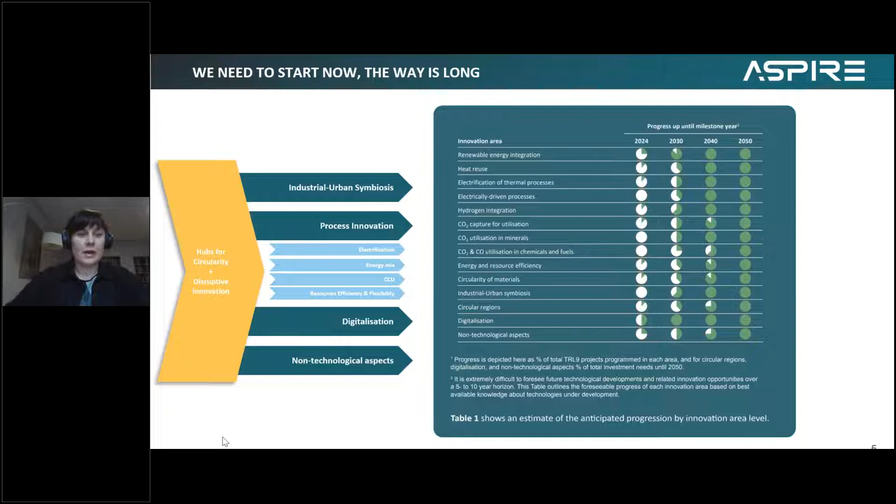As you can see, the most relevant in terms of scope are renewable energy integration, electrification, electrically driven processes, and so on. However, we know there is no silver bullet, so there will not be one innovation that gets us there. What we are looking at is actually a combination, a mix, or what we call a tapestry of different innovations to achieve climate neutrality.

On the energy side, innovation is needed to change the energy mix through new technologies for the integration of electricity and energy efficiency. Also, waste energy reuse will be playing a significant role. So we put all these areas that we identified as important contributors into the innovation areas and programs of Processes for Planet 3.

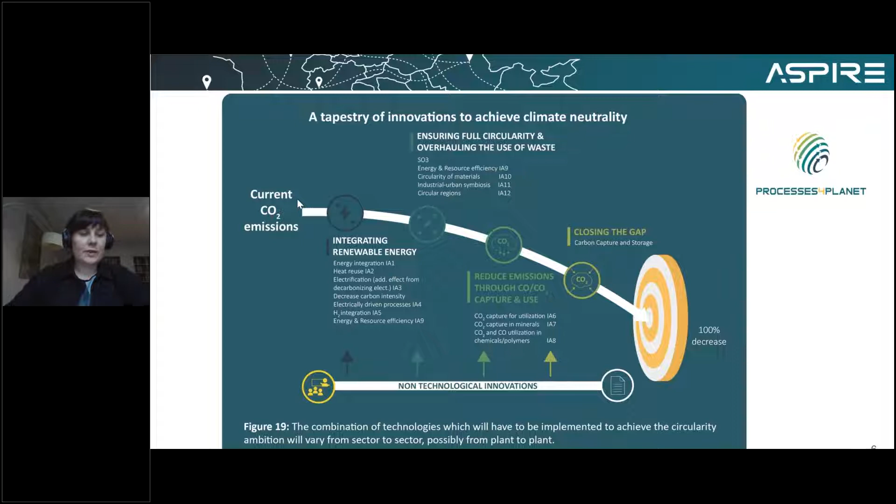If we put this all together, Aspire is a unique cross-sectorial community, and projects that have contributed to Aspire are of course part of it. Their innovations and advancements are very important there. Then we have Processes for Planet 3, which defines innovations that are needed to move forward. On top of that, we have defined 2 initiatives: the first is first-of-a-kind plants, and the second is hubs for circularity. I will not elaborate on them today.

With this, we are aiming at achieving impact and climate neutrality, near-zero landfilling, near-zero water discharge, and a competitive EU process industry. With this, I finish, and I want to thank you for giving me this opportunity to briefly introduce Aspire and Processes for Planet. I would like to hand over to the projects so they can speak about their innovations and achievements in more detail, because they are a very important part of bringing the process industry closer to its climate neutrality, circularity, and competitiveness goals. Thank you very much.

Thank you, Evelina, for giving this short insight into this research and innovation community of Aspire and showing us some really impressive numbers and insights on the impact. I would like to give over to one of the projects of today's meeting, which is Perform.

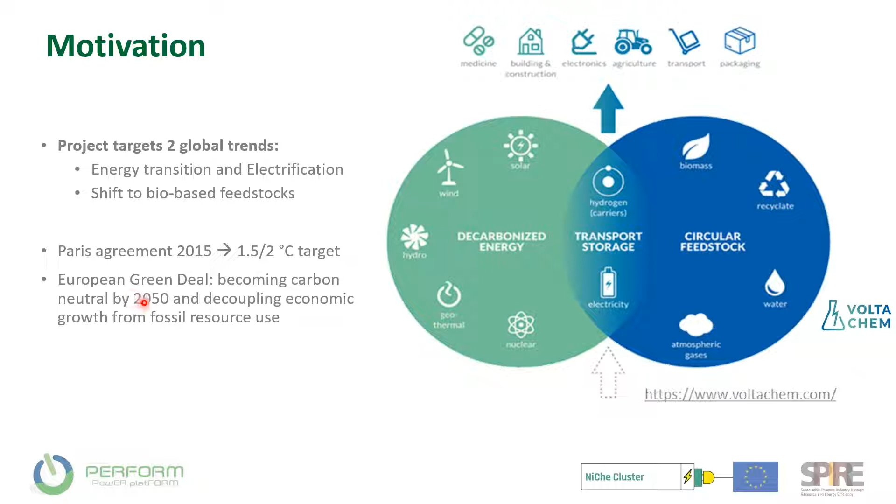The project concept is based around an electrolyzer, an electrolysis process where you use electricity to convert feedstocks. In this case, we're using renewable feedstocks from biomass, in particular second generation biomass that is not in competition with the food chain. We use renewable power, and we produce high value chemicals that could be new chemicals or plug-in chemicals for the processes.

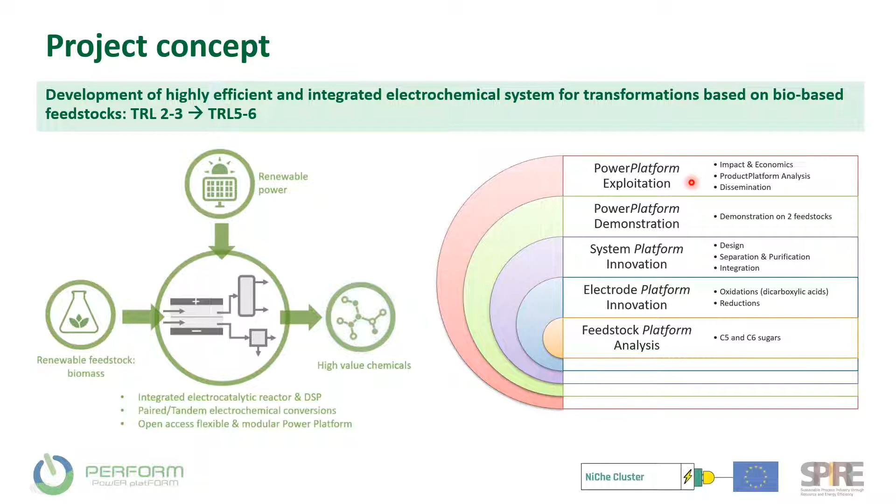The project is built upon different phases, based on the feedstock platform analysis, where we started with analyzing the sugars and the feedstocks that we can use for the electrochemical conversions. Platform innovations: we design on a smaller scale, then scale it up and integrate it and demonstrate it, and in the end it's about exploitation of the results. I'll come back to that later.

Key innovations in the project: we want to do paired electrosynthesis. In an electrolyzer you have an anode and a cathode side, and we want to utilize both sides, which is far more efficient than using only one side. The upscaling of novel electrodes, electrochemical process intensification, that's about integration, demonstrating the whole chain, and also the system design as a whole for scale up.

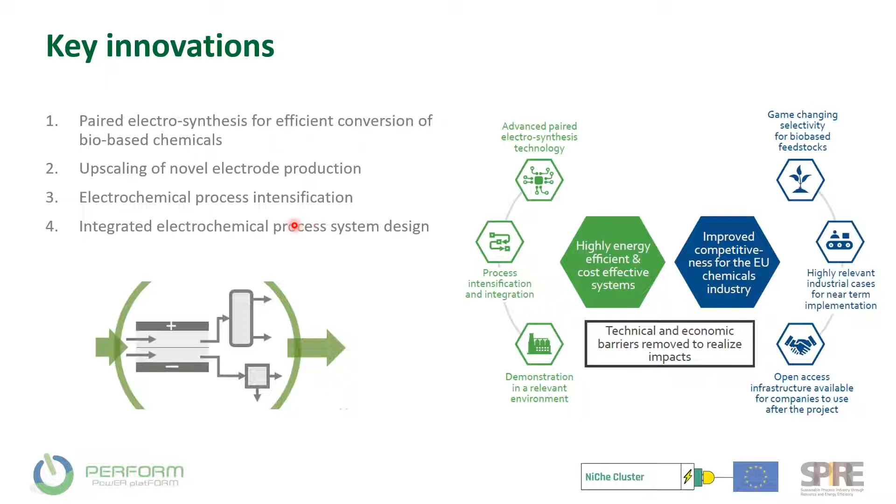We have two showcases. One is about paired electrosynthesis, where as input we use furfural and levulinic acid, and we will produce maleic acid and valeric acid. The other showcase is a tandem electrosynthesis, where we go from glucose via glucaric acid and oxidation, then hydrogenate to adipic acid. Applications of these products are polymers, plastics, lubricants, and also applications in perfumes and cosmetics.

This is backed up by our industrial partners, Novamont, Radici Group, and Perstorp, who will do the product assessment of what we get out of the demonstration, and test if the products are fit for their applications.

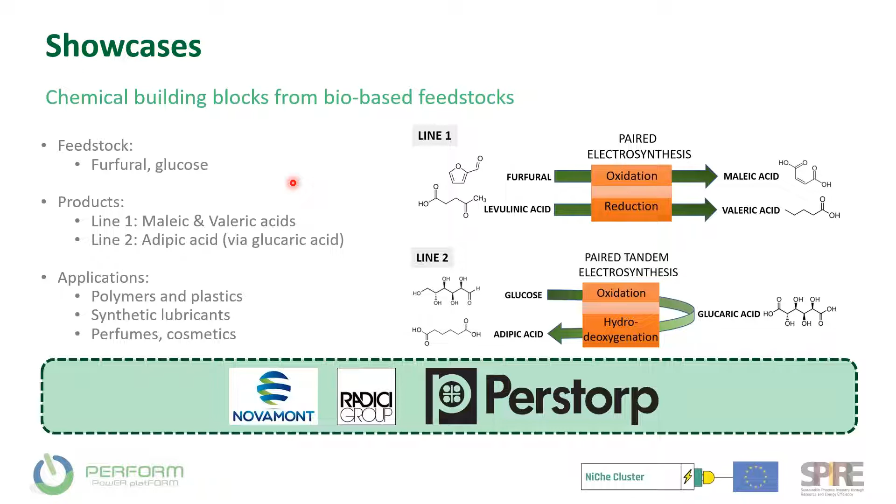We have a strong international consortium, 11 partners, 7 countries along the whole development chain, from electrochemical system and catalyst experts, research institutes, reactor development, system integration, until exploitation and commercialization, with companies and universities from throughout the whole of Europe.

Expected impact is described in the main KPIs that we defined, one of which is the electrochemical pilot. That is a big objective deliverable of the project, because it will remain and will be open access infrastructure.

We aim for increased energy efficiency compared to non-coupled electrochemical processes, because we're doing two things at the same time. We will develop electrocatalyst electrodes with high faradaic efficiency and low overpotential, which means less losses in your process for the selective oxidations. The aim is to demonstrate this performance at TRL 5 with selectivity of 80%.

An important part of these electrochemical conversion systems is the downstream processing. I'll come back to that later, because actually you need more units for processing than for the conversion itself. Techno-economics and benchmarking is always very important to show that you can scale it up in a commercially beneficial way, that you will have a business case, and also with respect to the decrease in CO2 emissions that you expect. Then dissemination, communication, and exploitation, already mentioned, very important.

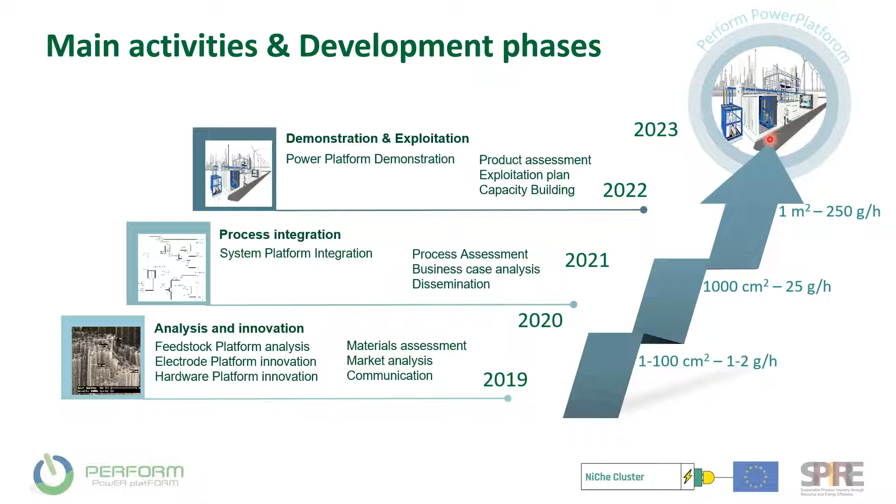That didn't work because there's a lot of problems in the logistic chain and materials and components that you just cannot order at the moment, with long delays again. The pilot will be ready now. All the equipment will be ready by the end of the year. So we will be testing in the first half of 2023, hopefully just before the end of the project, to get the great results that we aim for.

So some project highlights. Where are we? What have we done? Well, the feedstock has been analyzed, and we established a process.

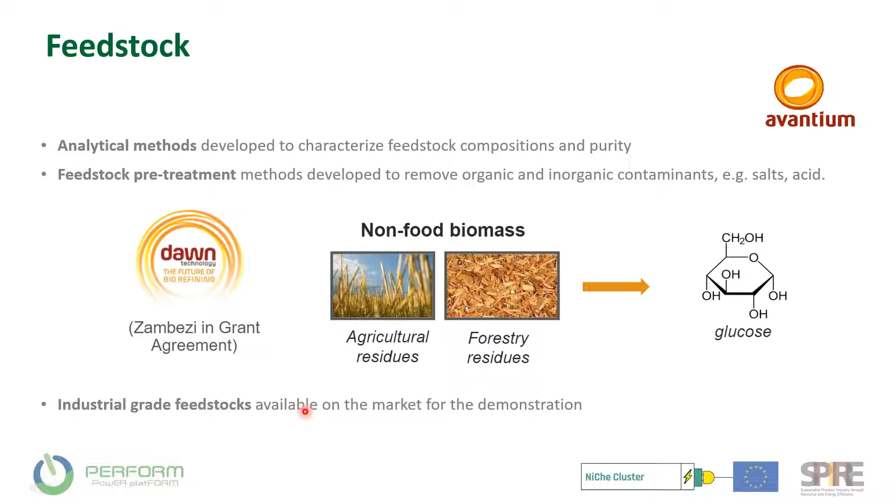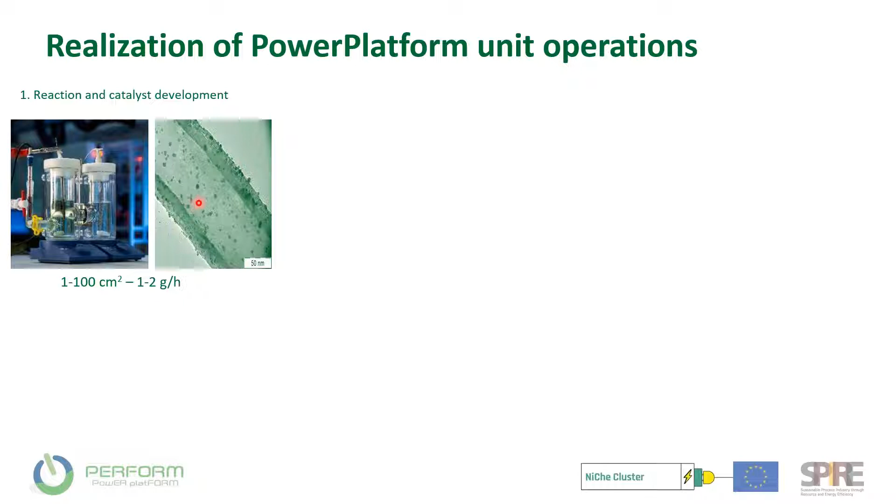In the Power Platform we started with reaction and catalyst development, so there will be new materials and new catalysts. Then we went to reactor and process development - this is the 1000 square centimeter reactor that we tested, developed by EasyTech and tested by TNO. From all this data, we could go to a process design for the full-scale stack plant that's currently being built.

It's similar to this one, and it's about container size, and it will go to 1 square meter of reactor stack, at 250 grams per hour.

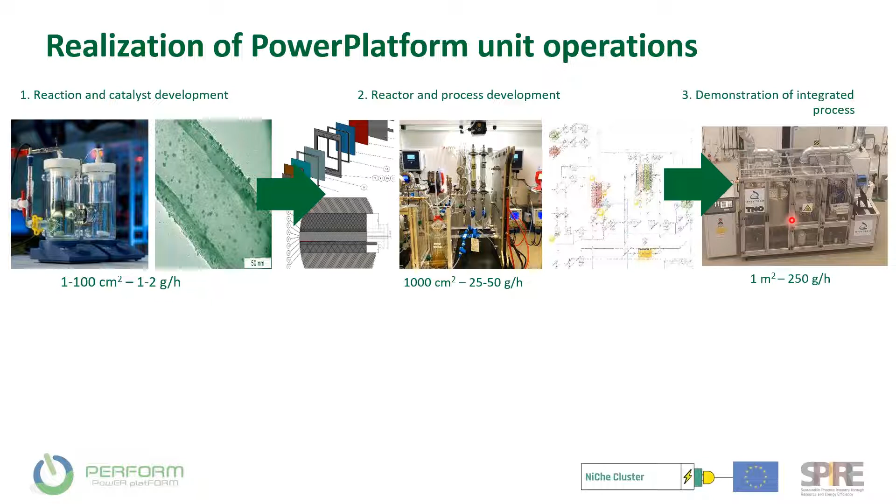Well, this is not it, because you need a lot of steps beside the electrochemical conversion plant, and that's called the downstream processing. So what do you need? You need to recycle your electrolytes, you need to purify your streams, you need to extract your products.

So we need a rather large electrodialysis setup to get the salts out again and for the recycle of your electrolytes. Then we have different units like concentration, crystallization, filtration, liquid extraction, and distillation. We don't use everything for all the routes, but these are the setups that are now available in a modular way, and we connect them together in one system.

And in the end, you arrive at your target product. In this case, what I show you here is maleic acid.

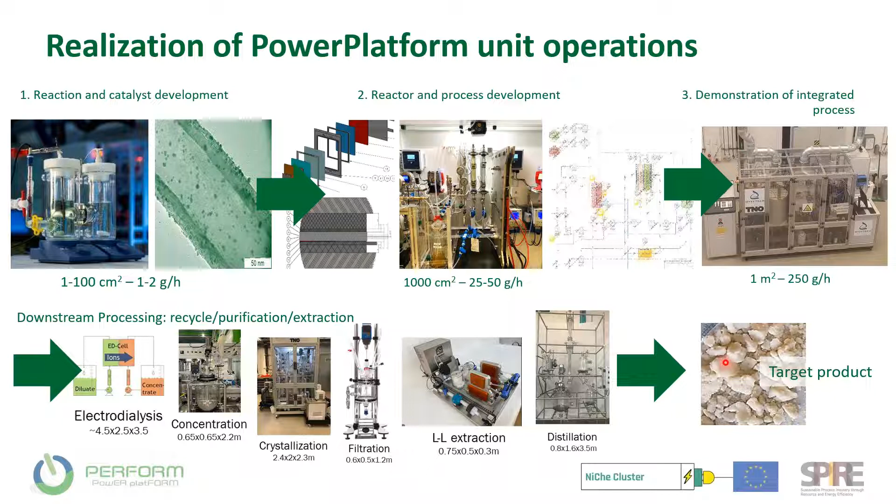To be a bit more specific, what we've been doing in the lab, we already showed this at 1000 centimeters square. Here is the reactor again. So the showcase here, we go from furfural to maleic acid. It's an oxidation in a 1000 centimeter square reactor, and we use a 5-liter crystallizer.

So we synthesize with a yield of 80% of 5-HFO, which is an intermediate to maleic acid, a conversion rate of 99%, and a faradaic efficiency total of 70%.

Then we did a separation process from the reaction mixture, using pre-concentration followed by cooling crystallization, filtration, washing, and drying. So that is the chain depicted here.

And we reached a separation yield of 85%, purity larger than 95%, already very close to the targets and the KPIs that we set ourselves.

We saw some coloration, so there is still some degradation products in there. And also there is some sulfuric acid still in there, which is the salt that we use for conductivity in the electrolyte, and it should be taken out, of course, in the product.

And there's also 1% of 5-HFO present still in the end product, and that can still be optimized in the final setup. So here you see how the product looks like in small scale. We can already do tens to hundreds of grams of product with this setup.

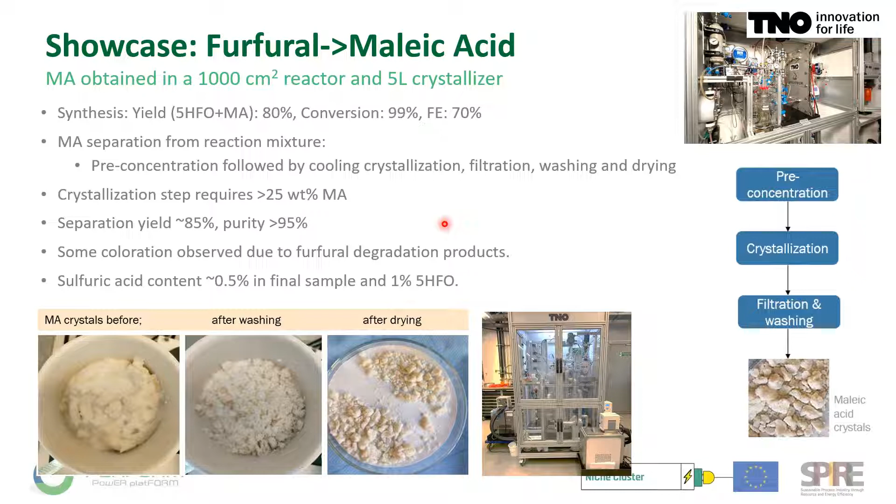And then, of course, we have to go to the full scale demonstration next year, and after that, we will have a lot of data gathered, and we can go to the process assessment and life cycle assessment, which is an important part of the project.

And we also can do optimization and scale up of the technology to have a development plan beyond the Perform project. What can we do with the platform? What can we do with the demonstration cases? And also, how can we maybe have different demonstration cases on the platform?

And the process assessment also comprises application testing that we're doing by the industrial partners. So this is a task in the project, and then another task is the business case analysis, where of course we have to show, or hopefully can show, that we already have attractive business cases.

And the preliminary TEA based on the laboratory data that I just showed you indeed shows potential positive business cases if we reach indeed the target performances. And for some of these products, we're already really close to that.

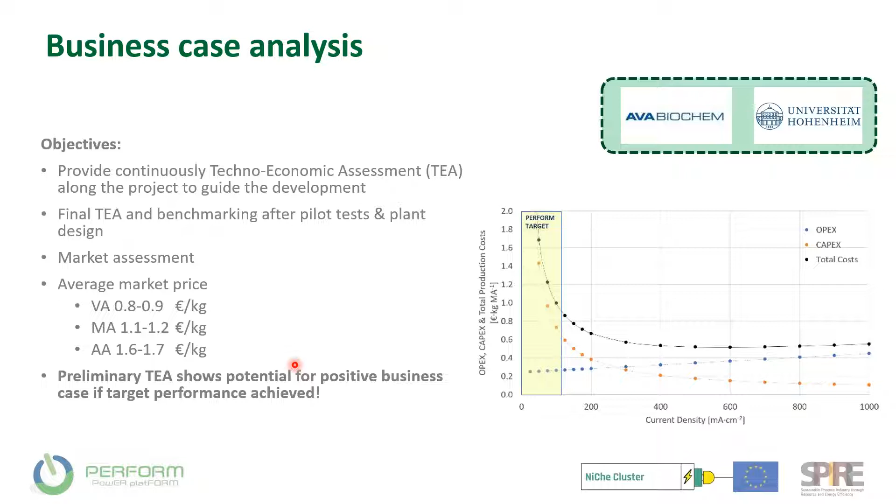And finally, dissemination, communication, exploitation, capacity building is very important. With this respect, I'm very happy to be able to present that in this workshop.

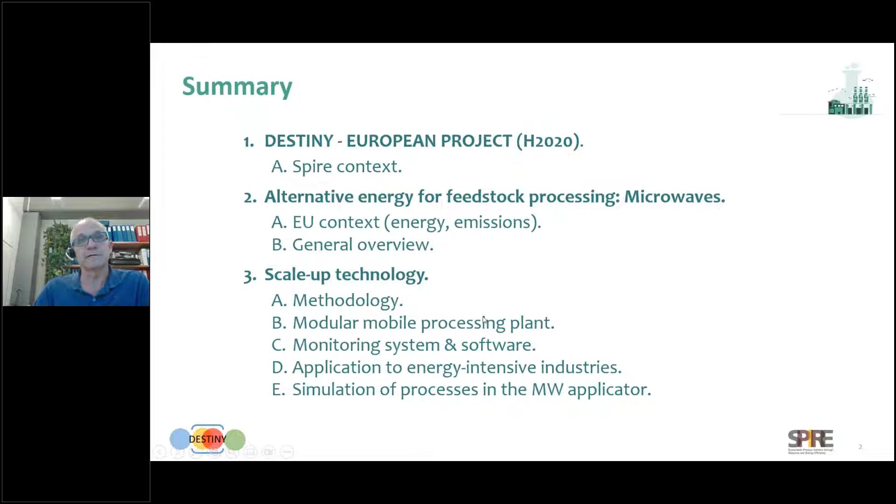This is the summary that we will speak about. Destiny is a European project inside the SPIRE context. We are using microwave as an energy alternative to the gas or fossil fuels we are using now, and later we will see the scale-up technology we are doing, or how it's developing at the moment.

Inside the context of SPIRE, we try to cover three main things: electrification of industrial processes using microwave technology. No other kind of energy source is involved in this, so only microwave technology for all the process.

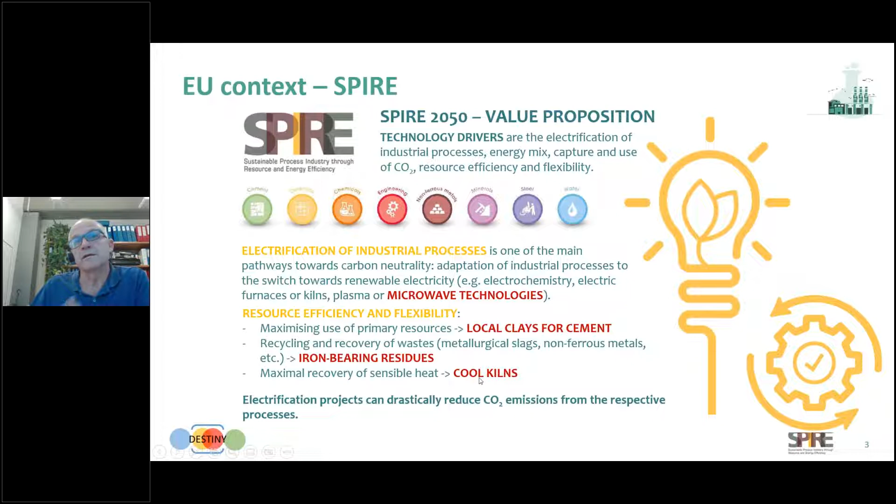And efficiency and flexibility: we are maximizing the use of primary resources, for example using local clays for cement instead of having long transport. Also recycling, using for example iron bearing residues from the steel industry, and maximizing the recovery of sensible heat using cool kilns. So this is the thing we are doing now.

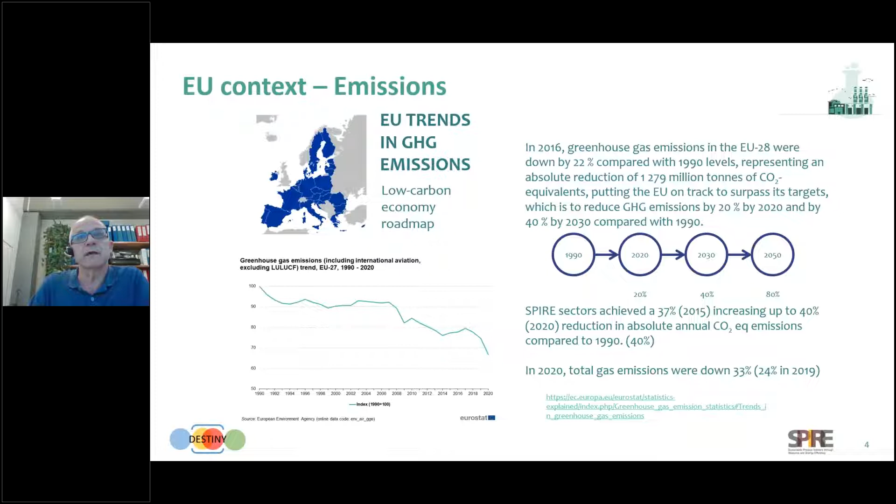In the context, unfortunately you know too well, the key issue in Europe is to reduce CO2 emissions, and electrification is one of the solutions. Microwave is the technology we use for many reasons, mainly because it's probably the most efficient at the moment to do that.

Unfortunately the price of electricity is now growing up too fast, and the geopolitical situation is of course pushing too much, and this also makes the opportunity to encourage and try to change the industry in Europe.

The general overview of Destiny is to try to do high temperature microwave processing using a first of a kind system for 3 materials in 3 sectors: cement, ceramic, and steel.

In the cement industry, using calcined clays as pozzolan to substitute 30% of the material, the clinker, with this material. In ceramics, it's used to produce pigments.

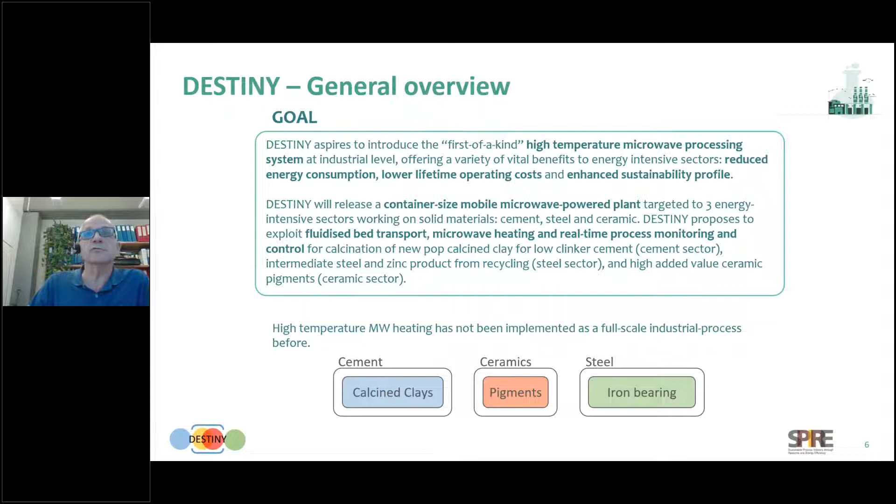The conventional colors are also new, so it's new technology - you can use new formulations, new colors, new pigments. And in the steel sector, for iron bearing materials, that is quite relevant to save these byproducts, converting the residues into byproducts.

The concept and challenge is to make a microwave system, knowing better the interaction between microwave and material, even creating new science and technology involved in the system - for example, determining the dielectric properties in continuous operation, and implementing this in the system.

The microwave applicator design is able to process high volume and high temperature for this kind of product.

The third point is the monitoring and control strategies, because it's a new system you need to monitor in different ways. You have different problems that appear, and you need to consider the system differently than conventional, longer existing systems. So there are many implementations we need to solve, also for microwave.

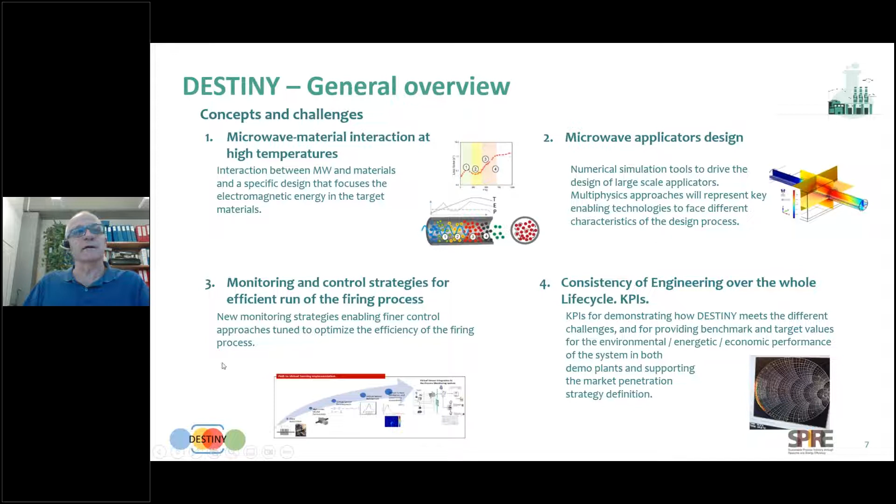The fourth point is the consistent engineering over the whole life cycle, and implementing the KPIs - determining the KPIs to demonstrate how Destiny covers the targets that should be covered.

The consortium is made up of 15 partners: large enterprises, SMEs, consultancy companies, research, technology providers, industrials - more or less covering Europe. Some countries are not directly involved, but indirectly they are also involved.

The concept and challenge is to make a first of a kind system, starting from raw materials, from feedstock. Some partners are quite expert in that - they have the industrial teams that can handle the microwave kiln system and cover all the other systems to have the final product. In this case it will be pigment, calcined clays, and pig iron and zinc, as you can see here.

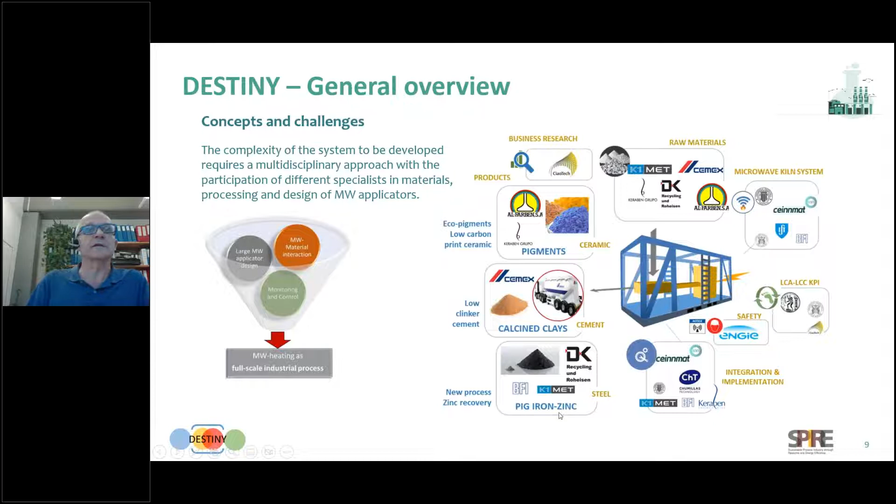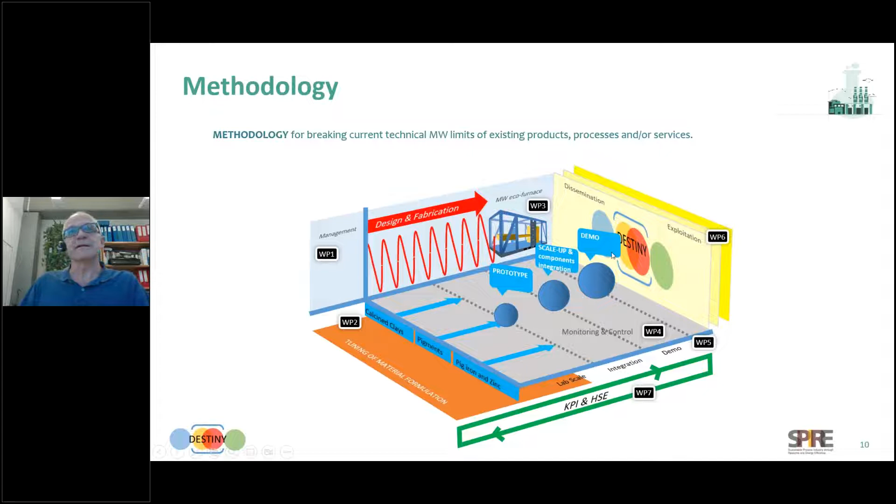The methodology for implementation goes from lab scale to integration and demo. Now we are at the last stage, and the other work packages are all running to cover the whole system. Now we are in the last step of demonstration.

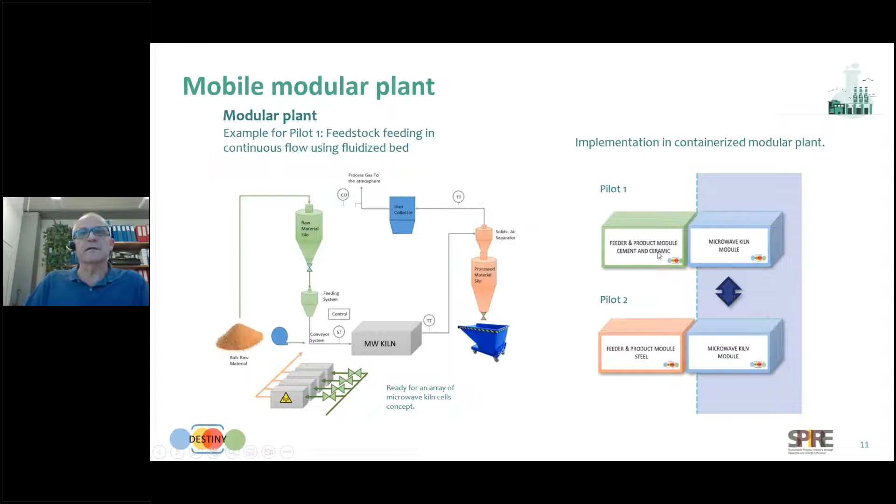So the idea was to develop a modular system, modular plant, based on the microwave kiln, that later you can replicate to have an array of kiln cells that we call a module to cover the production. So you can just add elements to create a huge plant. In the pilot, it's based on the microwave kiln module and the feeder module, and the feedstock. In this case, we decided to do different plants, one specifically for steel because it's more different, and the other with cement and ceramic, which have more similarities in the system.

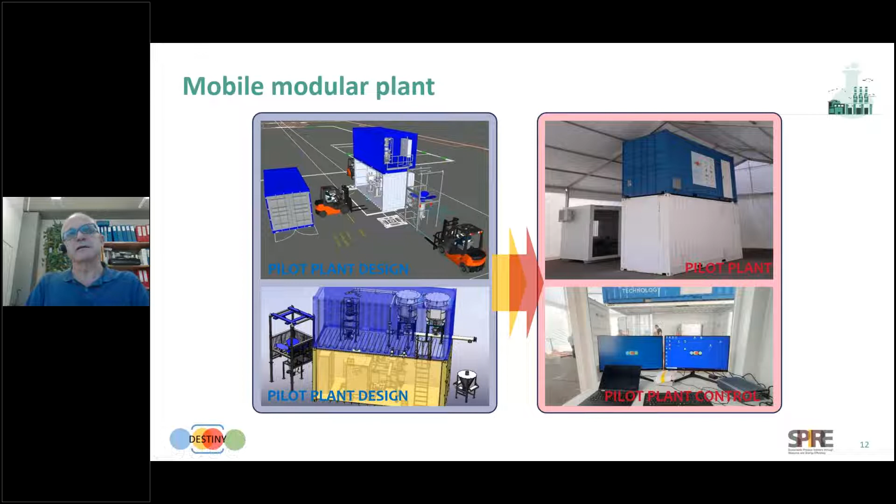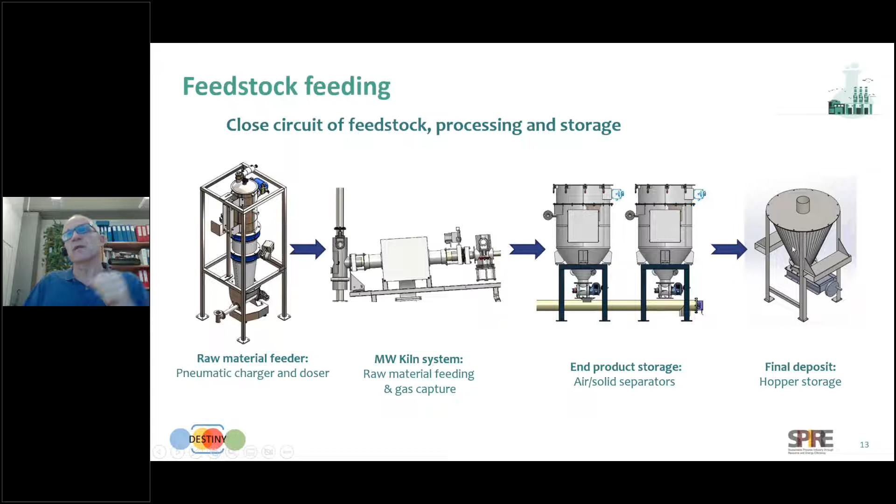So this is the feeding system, from the raw material feeder, all pneumatic, so it's quite fast. We are using the fast system, to final deposit storage.

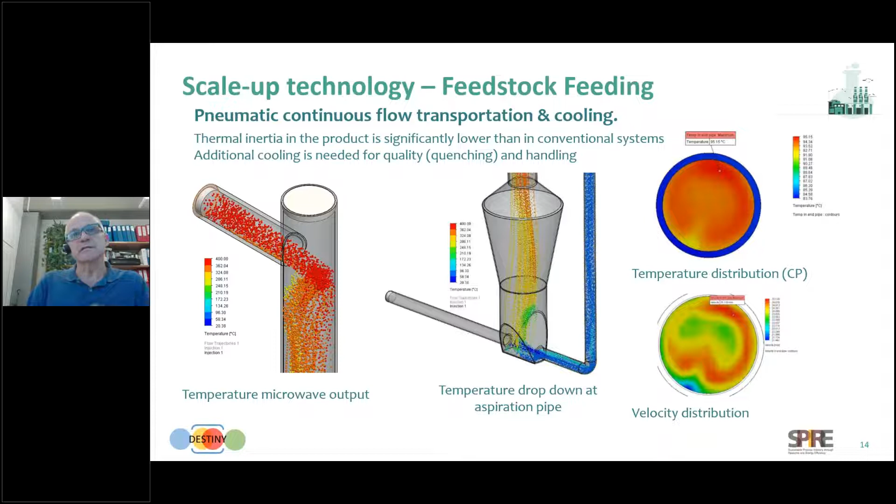Considering also the cooling system, because it's pneumatic it's easier and has some advantages, faster for the system. For the microwave, fortunately we have a very fast residence time, so it's very short, so the material can go faster than in the conventional system.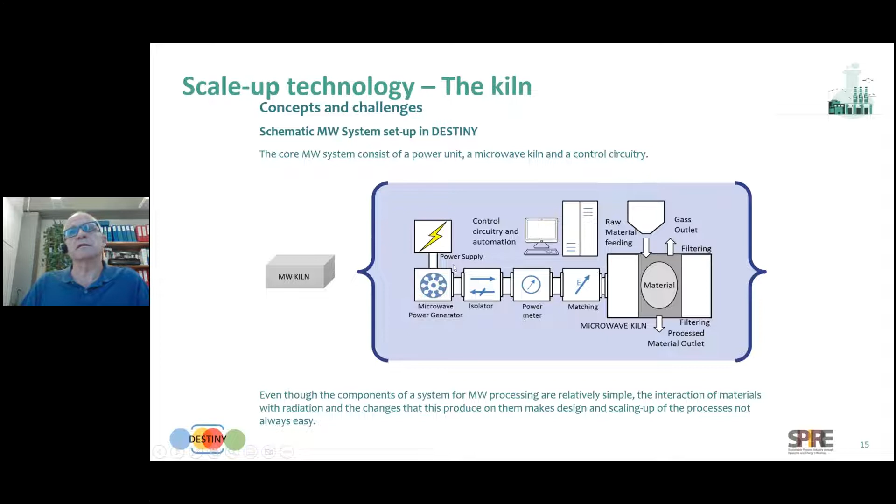So the system, yes, there are some technical things. Yes, how is the kiln? I will pass through soon.

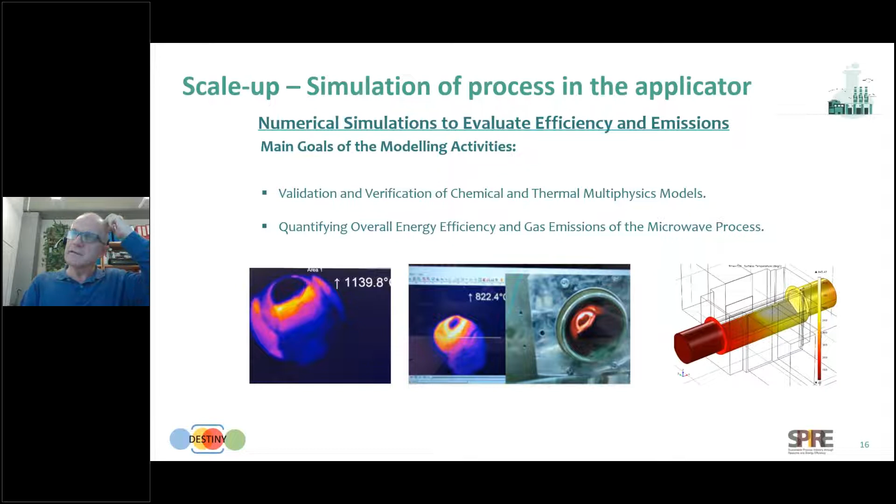So this is the modeling, just some screenshots just to see the aspect of the material going through the reactor, we can say, and of course everything is modeled before, and later just to correct things, the change.

And this is the comparison between the conventional and Destiny, the microwave kiln, just to see the difference and the main differences from each other. I can say just a few words: the conventional kiln is for large production, thousands of tons per hour, and this is not suitable for downscale. With microwave it's suitable for downscale, so for flexibility of production it's much better, and it has other advantages.

Other relevant things: the long start period that you need for the conventional system, and the microwave is switch and go. So it's quite fast to put into operation, and you don't need preheating or changing things. So it's quite simple from this point of view. It's difficult to create initially, but later it's quite robust.

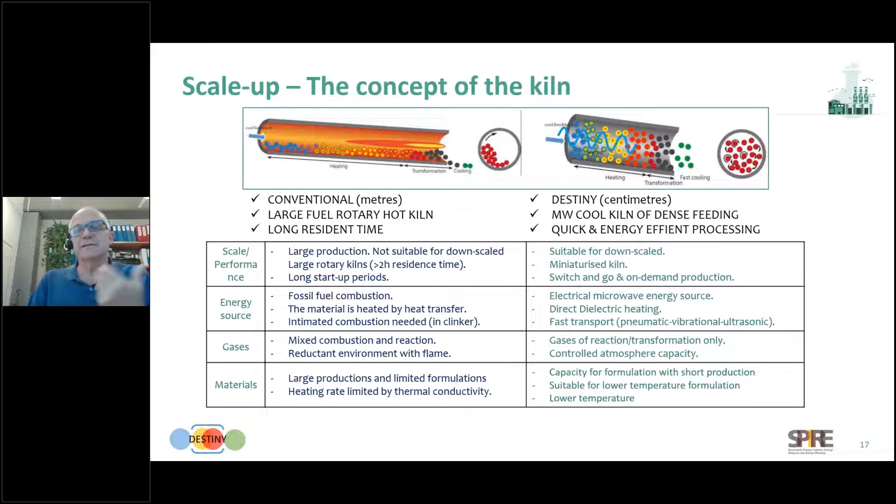Other relevant things are the gases. In the microwave you can recover the gases because they're only gases of reaction. So there's no CO2 contribution, no combustion gases, just the gases of the reaction that you can then use for other things.

Okay, this is the design, just to see from the design of the simulation to the performance. You can see here some points, how it is - it's marked red because we are working at more than 1000 degrees, so we are above this temperature. But the system casing is always metal, and it's quite cool, so they are not overheated outside.

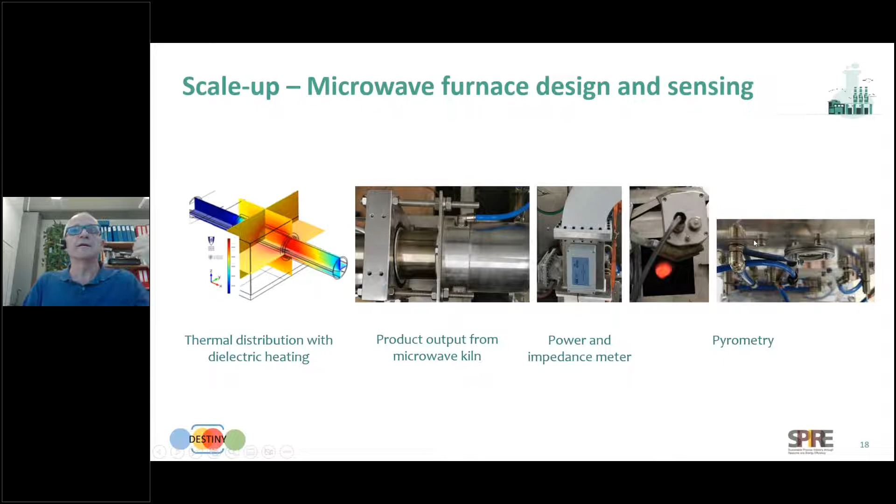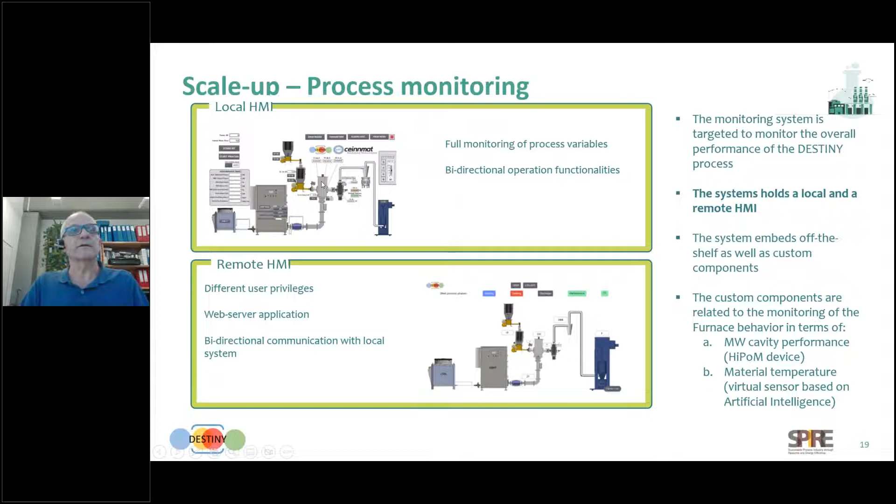A monitoring system, of course, is quite okay. You can control it by local screen, and also, from the beginning, because of COVID, we put in a remote interface just for the colleagues. They can take some samples, some inputs, some results from the beginning, and now it's very useful to work remotely. So you can operate locally and analyze the results remotely.

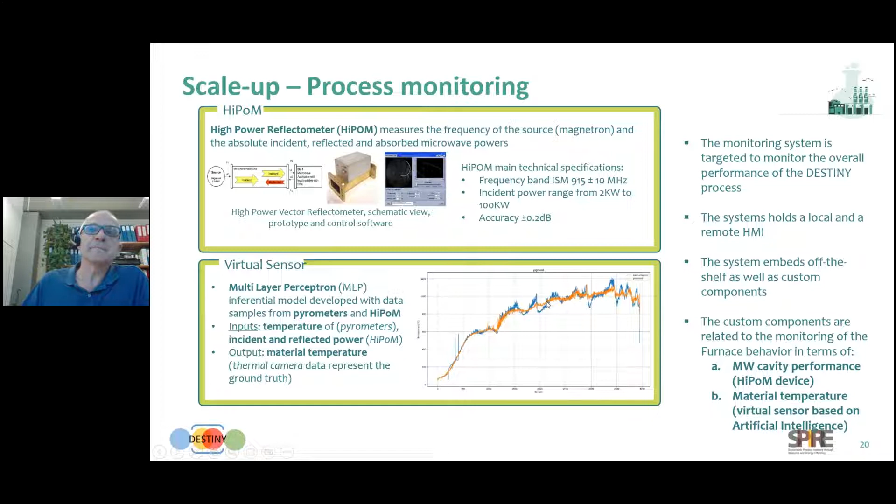So some detail of the data we collect. This is the system, how is the temperature - the real temperature is the blue one, for example, and this in brown/orange is the simulation you can obtain with the soft sensor that the team is developing.

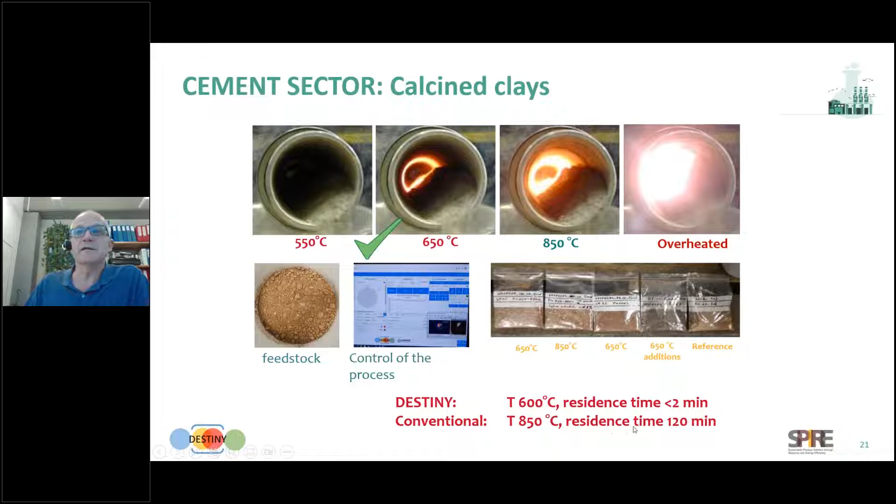So some example: in the cement sector, for calcined clays, we obtained around 600 degrees, a perfect target for perfect results. More than that was useless, was not needed. So the conclusion is that the advantage with Destiny is that 600 degrees is good enough, and residence time is less than 2 minutes, compared with the conventional process at 800 or 850 degrees, with a residence time of around 2 hours.

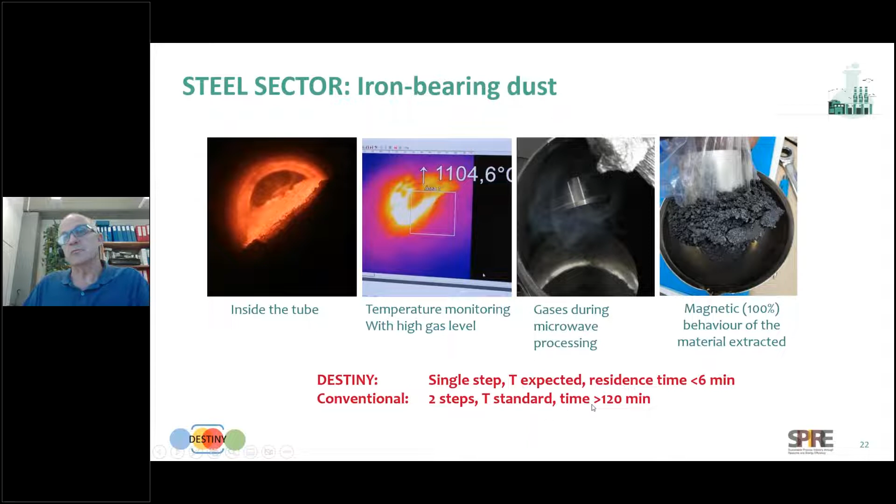And the residence time was 6 minutes compared with the conventional process that needed two steps, each one more than 120 minutes. So there's really improvement in time.

In the ceramic sector, this is the process. So advances in the project to process the material, in this case a blue pigment. In Destiny, the residence time was 4 minutes. Temperature is not reduced, so it's more or less similar to the conventional, but in residence time it's quite a significant change. So that's all from my side.

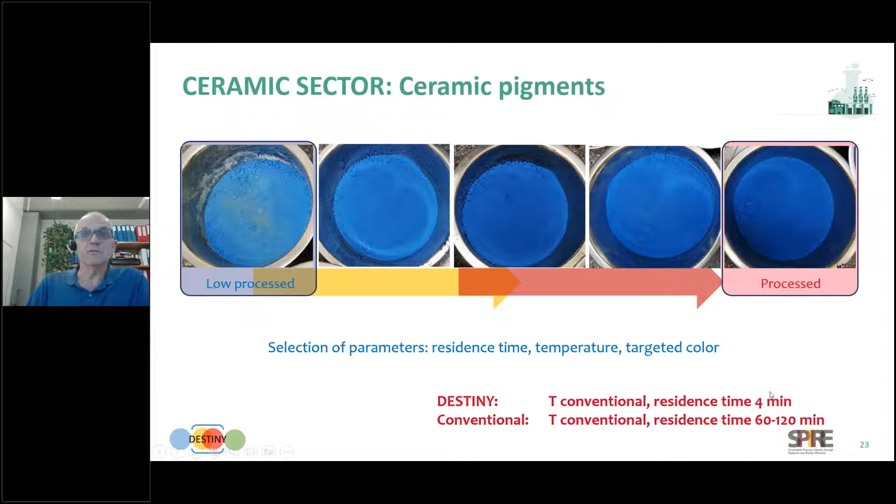Thank you very much for this opportunity.

Thank you. I would like to go to the next presentation from Tom, who will show what has been happening in Simplify, and then at the end we can come to the questions. So write your questions into the chat so we can address them afterwards.

Okay, I guess you can see my screen and hear me? Yes. Okay, very good. So thank you very much, just a second, trying to get this moved here. And now it's gone, of course, my screen. Yeah, okay, good.

Welcome everyone from my side. My name is Tom van Gerven. I'm from the University of Leuven, and I'm the coordinator of the third project being presented here, which is Simplify.

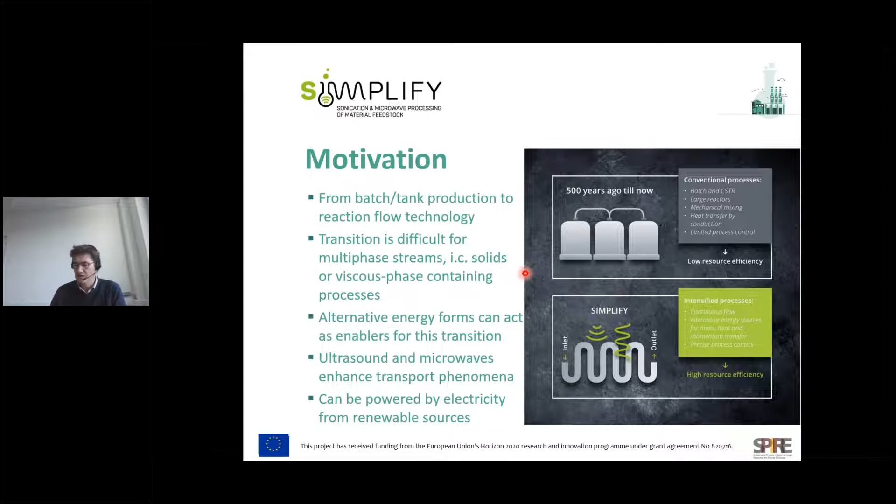The consortium consists of 11, 12 partners. We have end users—basically 3 chemical companies. We have Coatex, based in Lyon, a polymer company producing polyurethanes. We have Arkema, also a French company based in Paris, but the affiliation we work with is located in Pau. And then we have the Italian company Colorobbia, located near Florence. I'll come back to their case studies in a minute.

Not only the case studies, or not only the end users we have in the project—obviously we also have universities and research institutes.

I already mentioned University of Leuven in Belgium, but we also have Dortmund University in Germany. We have the Fraunhofer Institute, one of the Fraunhofer Institutes, the Institute of Chemical Technology, also in Germany. We have the university in Modena in Italy, and we have the National Technical University of Athens in Greece.

Then we have two technology suppliers, Weber Ultrasonics, dealing with ultrasound energy, and Mügge, dealing with microwave energy. Both companies are German-based. And then we also have two service providers, Quantis and Dinergy. Quantis is a Swiss-based company, Dinergy a French-based company, and they are dealing with exploitation, with valorization, and also with life cycle assessment and evaluation of carbon dioxide emissions.

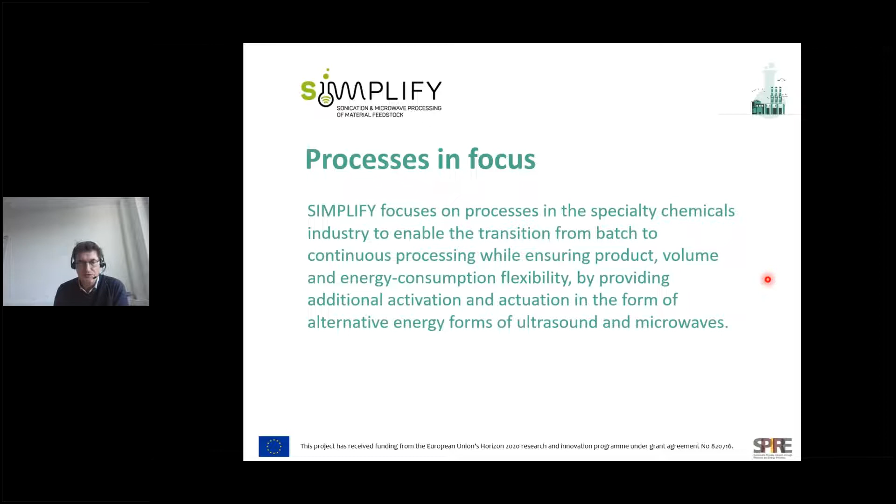More in particular, we have three use cases, and each refers to one of the three end users: Coatex, Arkema, and Colorobbia. The first one is the polymerization work, highly viscous streams, difficult to process in continuous reactors. There we have reactive extrusion as the continuous technology of choice, and we're dealing with polyurethanes. The Coatex company is the end user for that, and we're trying to combine reactive extrusion with microwaves and ultrasound.

Secondly and thirdly, we have two processes dealing with highly loaded suspensions. The first is suspensions with long residence times, talking about many hours. For that case, we have a zeolite synthesis, reactive crystallization case, and we're using as continuous technology a continuous oscillatory baffle flow reactor, COBR in short, combined again with ultrasound and microwave.

Then the third class of chemical process again involves suspensions, but now with very quick reaction rates. We're looking at a reactive precipitation reaction, nanotitania production in a plug flow reactor. Application of microwaves and ultrasound is again relevant for this plug flow reactor for nanotitania synthesis. This is the Colorobbia case; the previous one was the Arkema case.

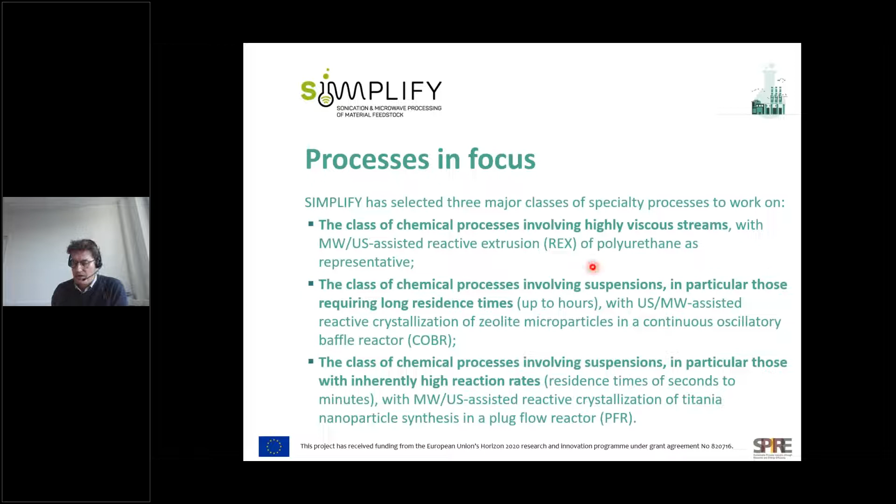So how do we approach these cases? We have one case study in reactive extrusion, and two case studies in reactive crystallization or reactive precipitation. So you see here the polyurethane with Coatex, the zeolite synthesis with Arkema, and the titania or nanotitania synthesis with Colorobbia.

We're looking at two types of alternative energy sources, microwaves and ultrasound. Very important is the process control, making sure that works not only from the perspective of these new energy forms, but also from the perspective of working with renewable energy - renewable electricity, which comes with a certain temporal supply at certain time spaces, and this needs to be integrated into the process control system as well.

Obviously, we have the supporting work - dissemination, communication and management, technology transfer, and the life cycle assessment also in place for the project.

In terms of results, we approached the project as follows. We started in two parallel tracks. First, one parallel track in the beginning of the project was a parametric study of microwaves, ultrasound, and process control strategies for the different use cases. That's work mostly done at the university sites and the research institute sites.

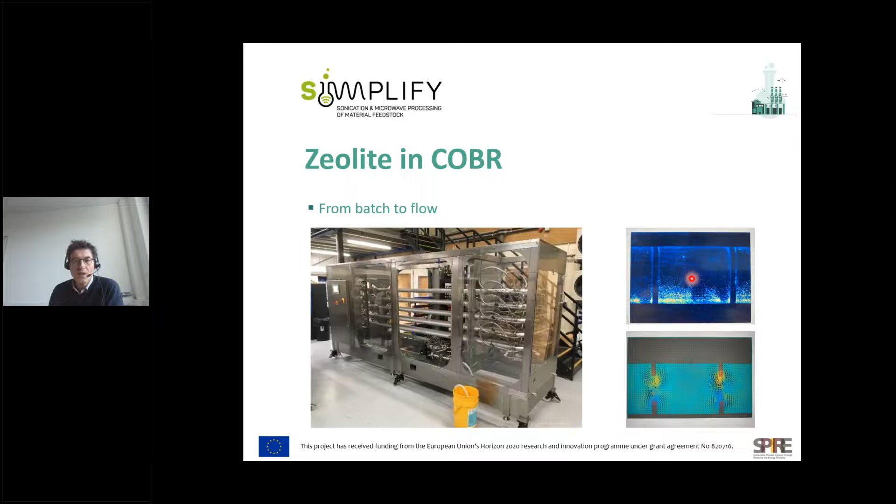As I mentioned before, we're now also integrating ultrasound and microwave at different locations in the system. We can have, for example, microwaves present for heating of the different feed materials, but also along the COBR. We can also have ultrasound in the mixing phase, and again within the COBR for nucleation enhancement of the zeolite nuclei, or also for deagglomeration of the formed products.

A picture that shows a little bit how this is integrated. So here you see the bends of the COBR. We're able to put the sonotrode at the bends. This is at the beginning of the COBR, where we're using the ultrasound probe for reaction kinetics enhancement. More towards the end of the reactor, we're basically using ultrasound for deagglomeration.

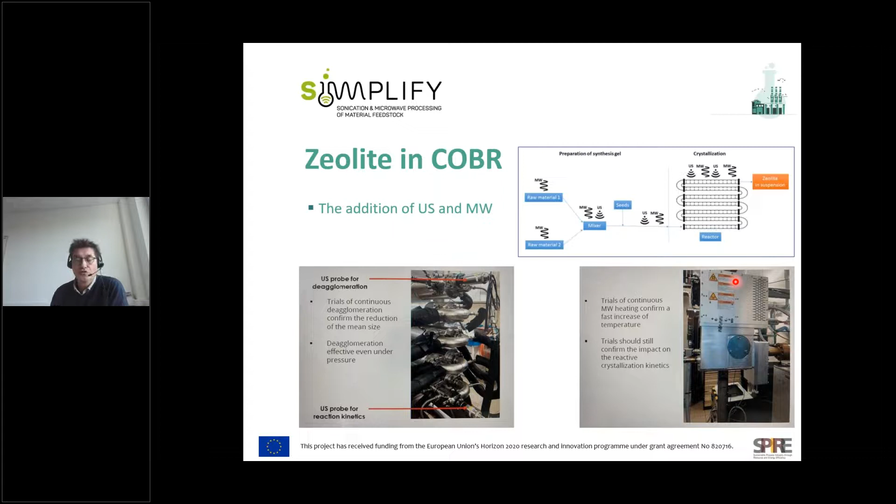The same holds for microwaves. We were a bit delayed there, also due to materials that were not arriving due to the COVID pandemic, but we now have everything in place to perform the experiments there, to use the microwaves in the COBR as well.

And then the last use case is the nanotitania in the plug flow reactor. That's with Colorobbia. This is also a batch process at the moment. We've investigated both ultrasound and microwaves. We've seen that ultrasound is not really the most relevant technology there, so we've continued with microwave heated plug flow reactors.

Basically, this is the process that we've been investigating, one of the processes within the nanotitania synthesis, which is the first stage of the process. So the precursor is being mixed with reactants, heated for the synthesis, then distillation of some liquids that we want to recuperate, and in the end we have a colloidal suspension with the required concentration.

A picture of the microwave installation. We've done a lot of work on building the right geometry needed for the plug flow reactor. Basically, the plug flow reactor is a straight tube inside the microwave cavity. And the work on the microwave cavity has been such that we're trying to enable a uniform distribution of the microwaves along the tubular reactor.